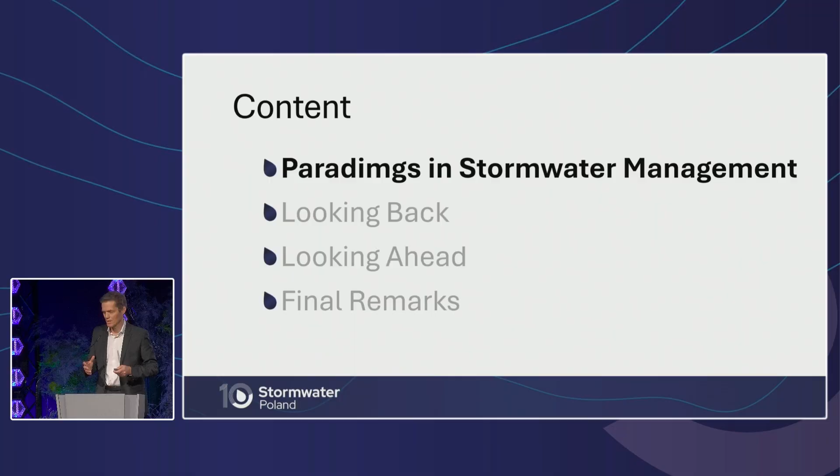So actually, I asked myself, what is a paradigm? And of course, I didn't ask myself, I asked an AI. And Gemini told me a paradigm is a shared set of assumptions, concepts, values, and practices that constitutes the framework of viewing reality and solving problems within a specific group or discipline. I think most important is the term assumptions, and it's basically the way we see and do things in our discipline.

That's our paradigms. We have theories that we check and develop and redevelop, but behind all this, there's the paradigms. There's things that we don't discuss. And that leads us to the next sentence, that paradigms act as subconscious filters. And that's important, they are subconscious. That's the problem. We cannot actively change them because we're not aware of them.

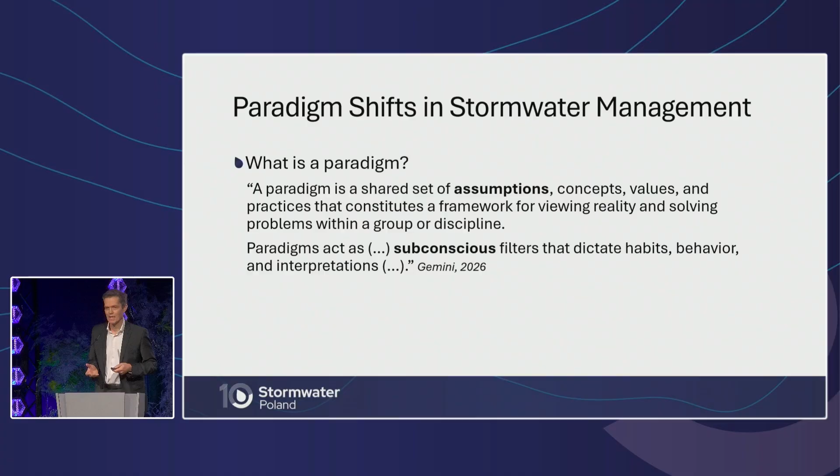So then how do paradigms shift? If we announce a paradigm shift, we have to know that there's something going wrong and we want to do something. I tried again with the AI, but the result was not nice, so I put it in my own words. When a paradigm produces unfavorable results, it may undergo a paradigm shift, which is a fundamental change in basic assumptions. And what does it mean for stormwater management? Like in physics, it's clear. You do an experiment and the result doesn't go together with anything you expected, so you have to change your paradigms. But how is it in urban drainage?

I liked the talk of the mayor this morning because he said it would be nice if we could monitor everything, parameterize it, have numbers and know where we go and assess what we're doing. But actually that's not the case yet. So we don't have a clear indication of a failure of old paradigms. And the other thing is that our observations are incomplete. What we do has many impacts on biodiversity, on many aspects of environment, and we don't have the whole picture. So we cannot really see if what we are doing is good or not, and in which way we should change. So it's more a consolidation of negative experience, which may trigger a paradigm shift.

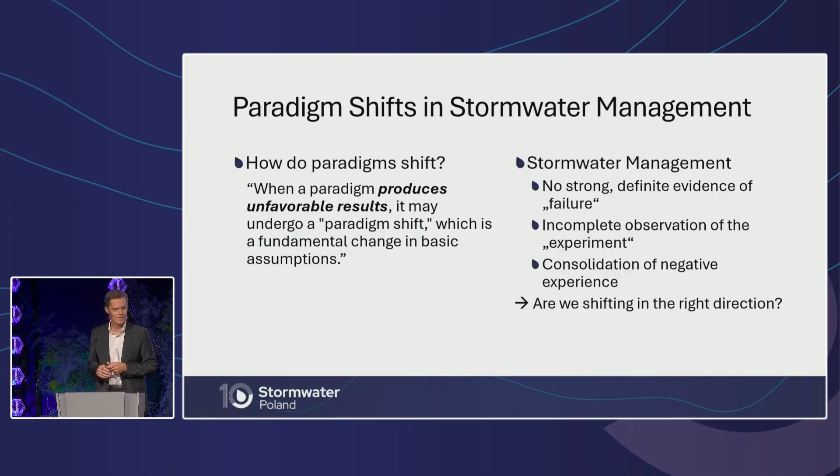And the question is, as everything is so fuzzy and we don't know exactly where we come from, where we go, are we moving in the right direction? And I think that is important with any paradigm shift. And if we want to know if we're moving in the right direction, we first have to look back at where we come from. And so I wanted to take a look back 35 years. Why exactly 35 years? Because that's when I started my university studies, but that's not important to you.

But in the early 90s, there was a lot going on, at least in Germany and in some other EU member states. And I have this very nice reference, this stormwater pollution control report that compared stormwater pollution control measures all over Europe. There was one more thing I wanted to say, but I just forgot. So this report states that in practice, there are some paradigms. It doesn't say it explicitly, but if you read it, you find that urban areas have to be drained fast and completely. That was the paradigm at that time.

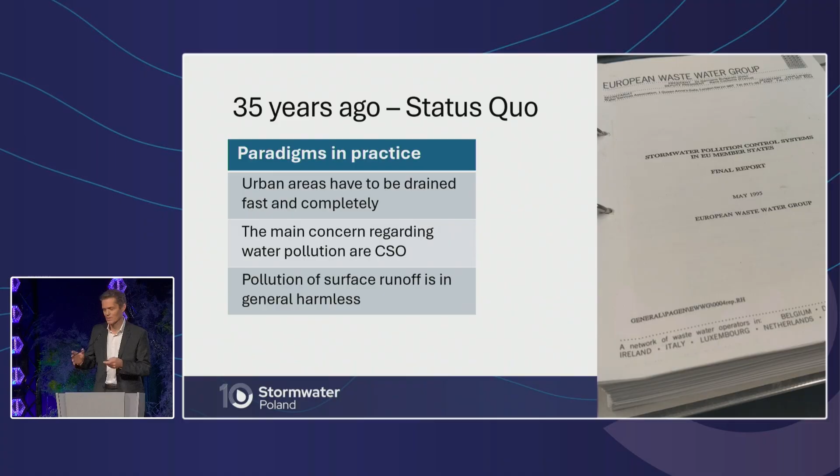The main concern regarding water pollution is combined sewer overflows. So if we don't have combined systems, we don't have a problem. Because, and that's the third one, pollution of surface runoff is no problem in general. So that was the way of thinking at that time. I'm happy that Richard is nodding.

And the consequences are that underground drainage systems were everywhere, because that's fast and efficient drainage. We want to get the water away. And then there were some regulations in some member states about CSO, but there was nothing on stormwater. And even CSO regulations were based on dilution, because we assumed that stormwater in itself is clear.

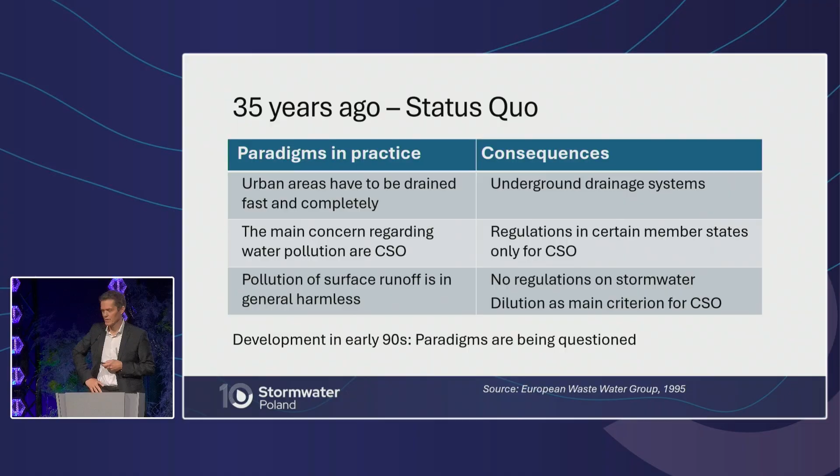But this report also states that there are some developments going on in the early 90s, and that these paradigms are increasingly being questioned. And one new paradigm was, what Herbert already mentioned, that we could manage the rain where it falls, like do source control. And that source control measures can substitute conventional drainage with lower environmental impact and at the same service level. So the goal was to reduce runoff, keep the water where it is, and do something with it.

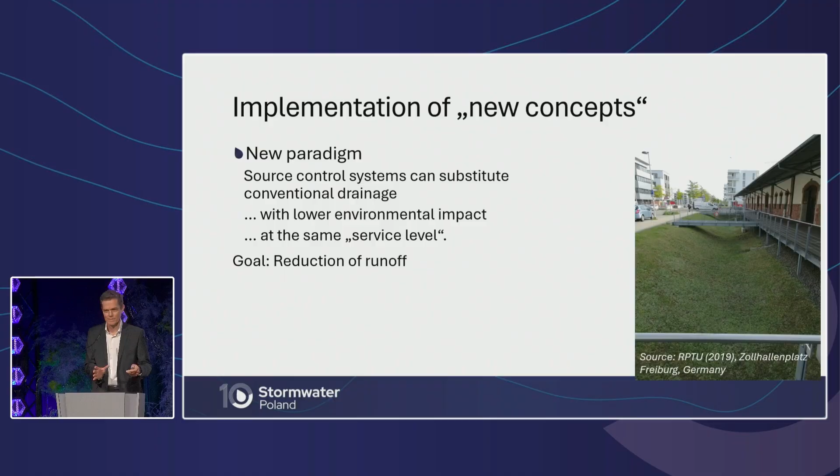But what? The main idea was building infiltration systems or bioretention. Water is retained for subsequent infiltration. And the design storm, or the idea was to have it at the same service level. That means design it for the same rain intensity as we would do with conventional systems. So we can completely replace the existing conventional system by something new, more nature-based.

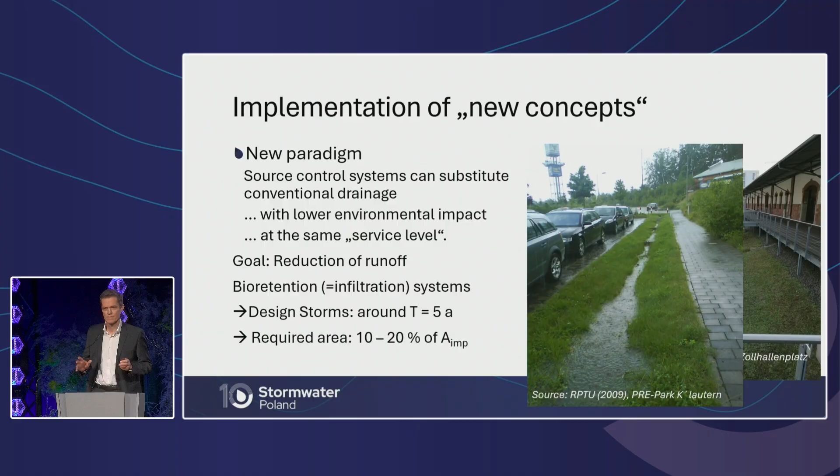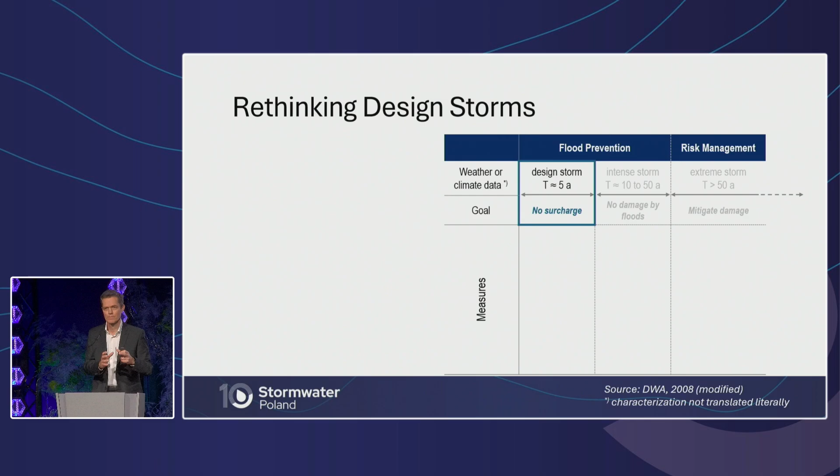Or if we build a new one, we don't even build the conventional drainage system. We just build these types of swales, retain the water, and let it infiltrate. But this requires around 10 to 20% of the connected impervious area. So that was the idea. That means the scope, what I marked here in this blue-grayish box, that's the scope of drainage. And that's the same for conventional systems or nature-like systems.

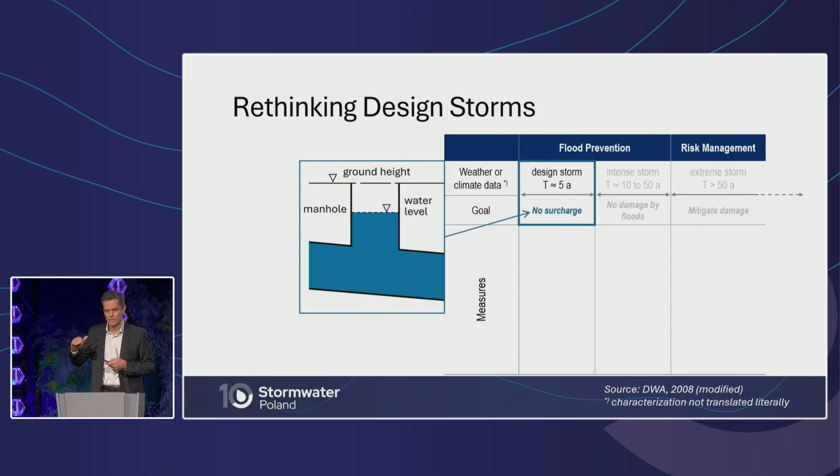The idea is up to a certain design storm that is around 5 years. It could be 3, it could be 10 in some areas, depending if you're in a city or in a less densely populated area. And water shouldn't leave your system if you don't reach this 5-year event. And this also is the same for the nature-based systems. So the scope is the same, it's just a different type of technology or hardware, let's say. And once the water leaves our system, it's not our job anymore. Somebody else has to take care of it.

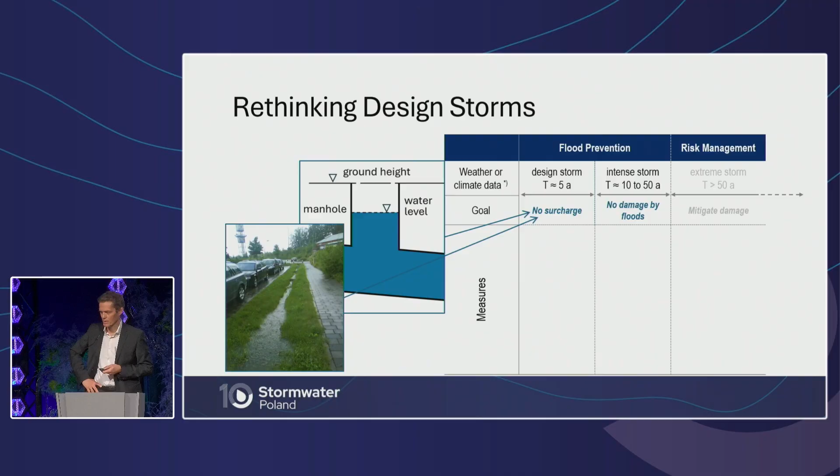But in the following years, there was more and more discussion, probably triggered by fear of climate change and more intense storm events. And urban drainage engineers became aware that it's too easy to say that's not our job. We have to handle this, and we have to work together with people that are managing the surfaces, like city planners, greenery planners. We have to get an interdisciplinary approach.

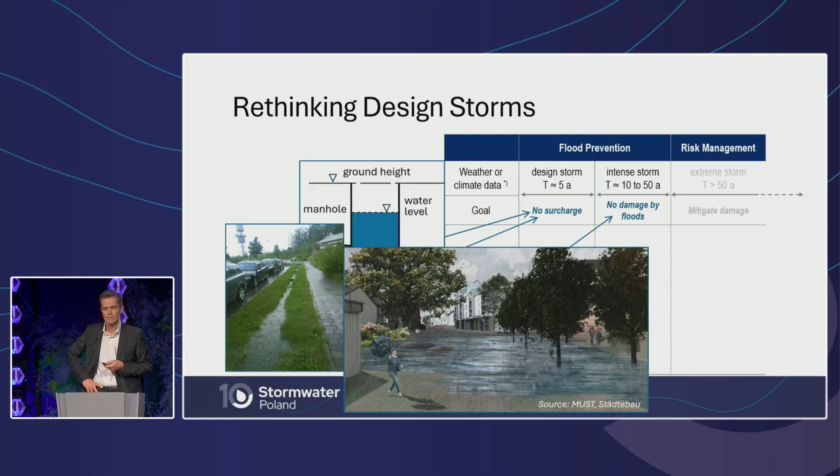And the results were, Herbert showed a lot of them. This is just one simple example of a multifunctional area. It's a square that can be flooded, and of course it's not just a flooded square. Below the square there's still a drainage feature, so we can retain the water there and have a multifunctional area.

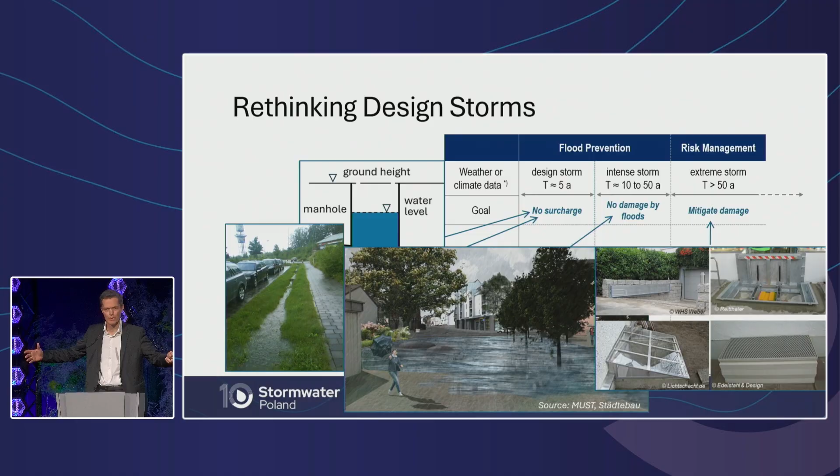But we still have to go further. What happens if this comes to a limit and we have more extreme events, and how do we mitigate damage in these cases? You're all aware, I saw the SCALGO stand here outside, that now we go up to the 100-year event and calculate this and give advice to private property owners how they can protect themselves against flooding. So the scope got much broader in the 90s.

What you see here on the right side is a very famous picture that is often used in Germany. It shows the 3 levels of severity of storm events, and that we need different types of systems or different measures to handle them. So stormwater management cannot stop at a design storm. It must apply a wide range of different measures, and it requires an interdisciplinary approach. I think that was all touched already in the previous presentation.

And it is a joint effort of various stakeholders. So it's the drainage engineers, it's the urban city planners, it's politics, and it's also the private property flood protection that is necessary.

Parallel to this, there was another tendency, another questioning of our goals, and that led more to the urban water balance. So one is these extreme storms that we talked about, heavy rainfall, but on the other hand, what happens with the day-to-day rain event? So there was this additional goal to minimize alterations of the natural water balance. That's a new goal that came up like 10, 20 years ago, to reduce the impacts on flow regime on urban waters and to reduce heat island effects.

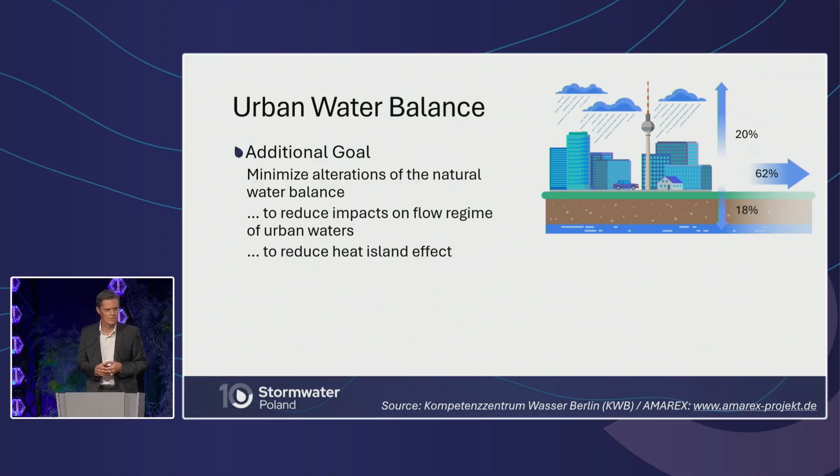You all know, as was already said, that in our cities, these are our numbers for Berlin, but it's the same in every city, the large part of the rainfall is converted into runoff, only a smaller part is infiltrating, and roughly the same part evapotranspirating: 18% infiltrating, 20% evapotranspirating.

But this is the natural system. That's where we come from. So it's a huge alteration. If an area is urbanized, the water balance is completely changed. And now we want to go back to this pre-development state. That is the idea that we want to go to, so to have low alterations compared to the previous system. But how can we do this?

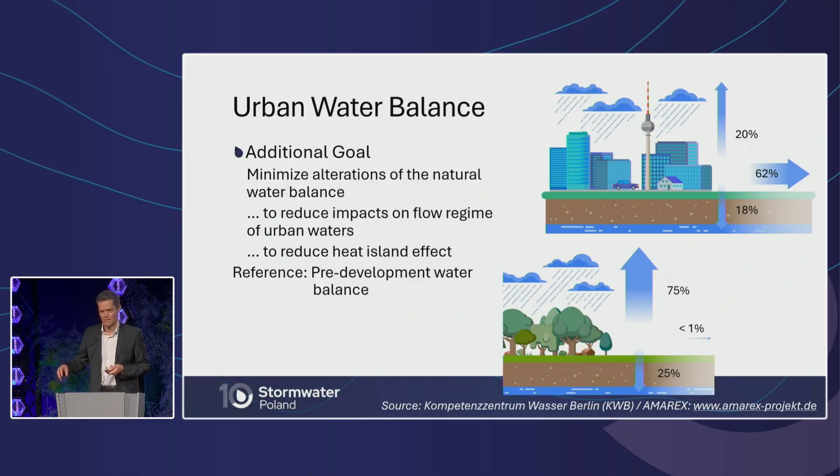Bioretention, infiltration would just increase the groundwater recharge. It would not increase the evapotranspiration, so we need to do something different. And that's where, for example, green roofs come in. This is a nice picture, looks like a garden, but it is a green roof.

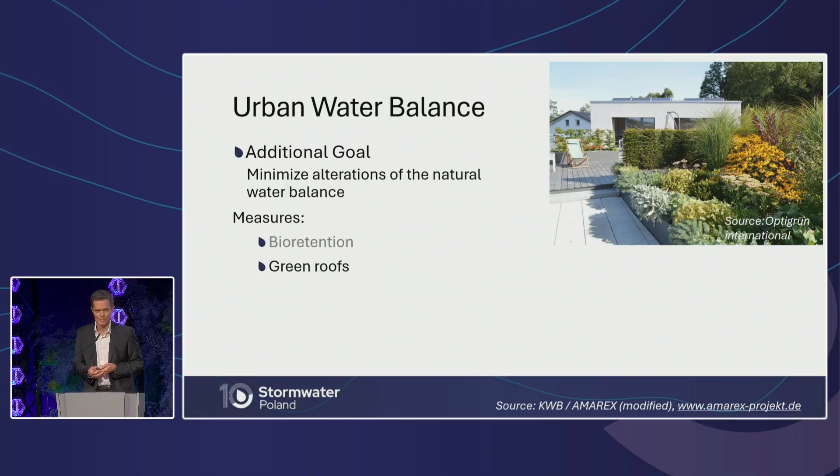Or we can store rainwater and use it for irrigation. Because if we put it on the plants and the plants evapotranspirate it, then again we have evapotranspiration. So that's another idea, just using runoff, storing it, and using it for irrigation. And I just mentioned here the keynote before, because there's a lot of nice pictures on that.

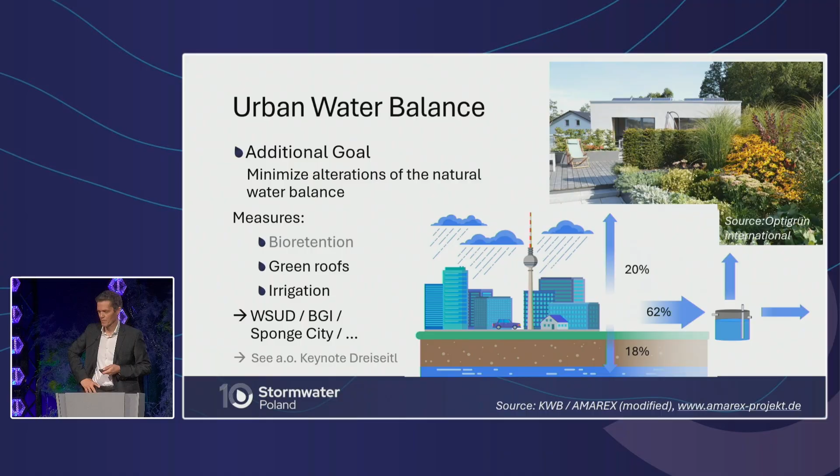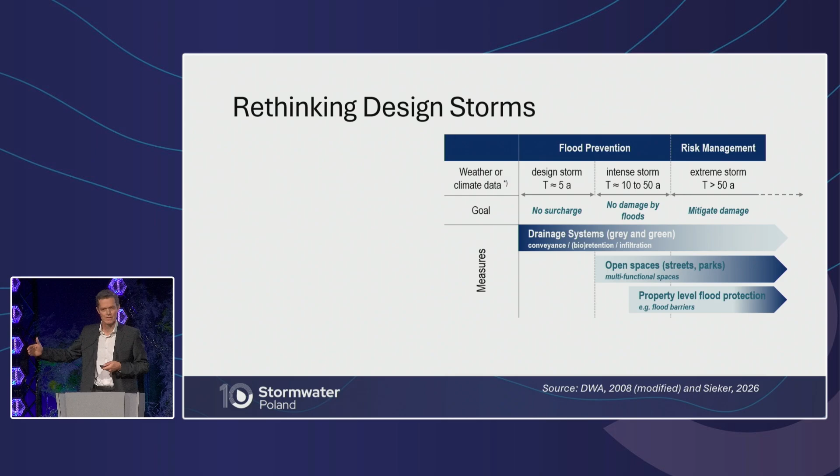So if we go back to this picture, we now have to add a new column. Because it's not only about events becoming more and more severe and more extreme, we also have the water balance that we have to consider. And in my view, to my knowledge, this is basically the up-to-date modern way of doing stormwater management, considering all this.

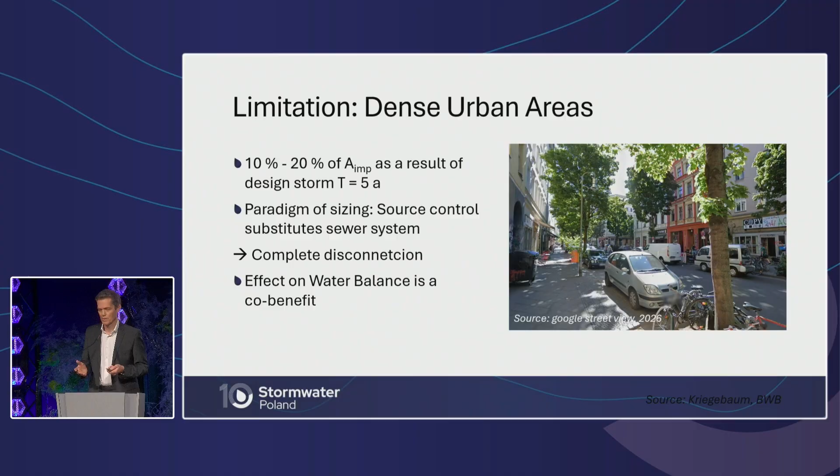But there are still challenges ahead of us, and one that is highly delicate is the limitation in dense urban areas. So how can we do this in an existing urban fabric? Look at this picture, it's taken from one of our study sites in Berlin. If you need swales, 20% of the impervious areas, where do you find them? It even gets worse if you look underground at the existing infrastructure that is already there. So then there's no space left, or hardly any space left.

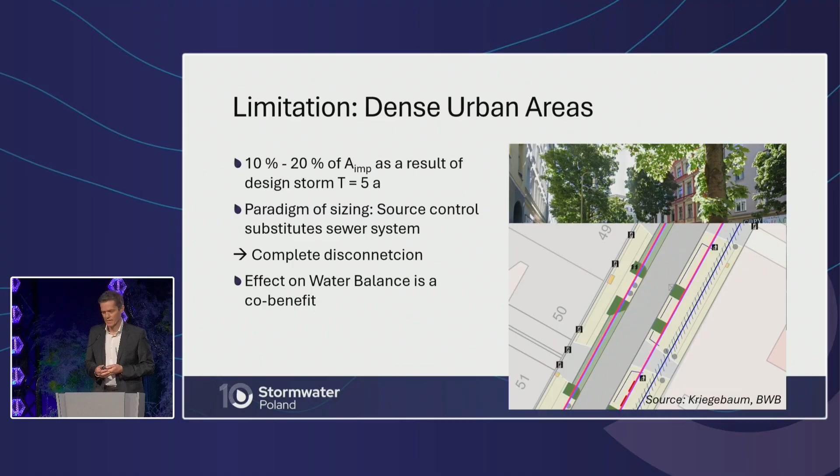But the problem, why do we have to sacrifice 20%? That's because we want to replace existing systems, to disconnect impervious areas completely. What if we change this? I would also call it a paradigm shift, but the word paradigm shift in this context seemed a bit big to me, so I put a question mark behind it.

But for me personally, it was a paradigm shift when I thought of it the first time, that we base design on the extreme events, on the 5-year event. But what if we do the design on the water balance and have it complementary to a storm sewer? So not as a substitute, but complementary. This would lead to hybrid gray, blue, green infrastructure systems that make the best of the existing system and just add something in addition.

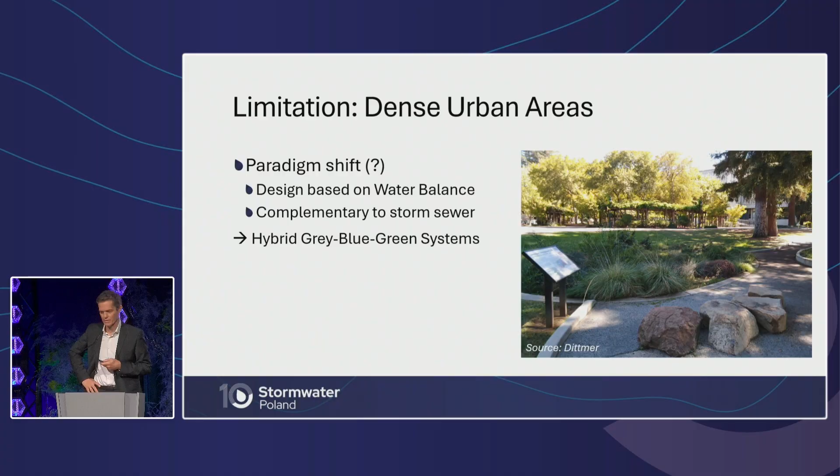There's a nice picture on the right. That's the Sacramento State University, the rain garden where they infiltrate the water from the roof. I was there at a research stay, and I made this photo, sent it back to a colleague, and this colleague said, oh, this must be a pretty small roof if this surface is large enough for infiltration. And I thought, why is it so small? And it's simply because they don't want to handle the 5-year storm or any heavy storm event.

They want to handle 85% of stormwater. That's their goal. And this leads to much smaller systems. Of course, it requires an existing stormwater sewer. The overflow goes to the stormwater sewer, and up to this 85%, you infiltrate. We tested this application for Berlin, and it resulted that we only need around 1% of the impervious area to design our biofiltration systems this way, so much smaller.

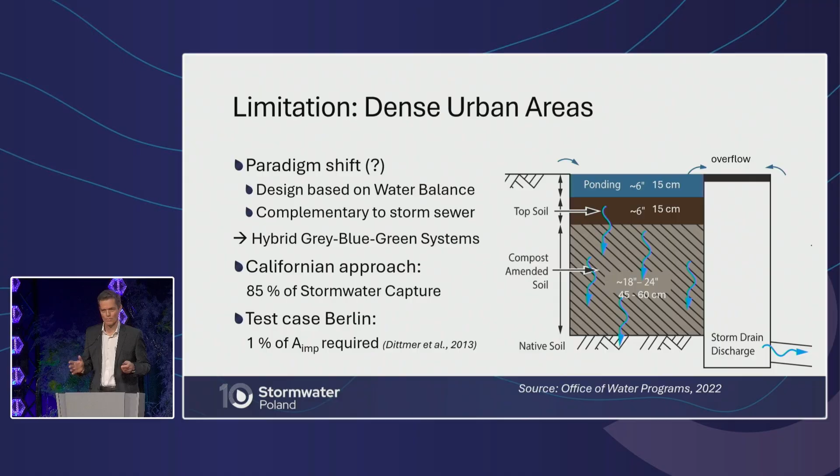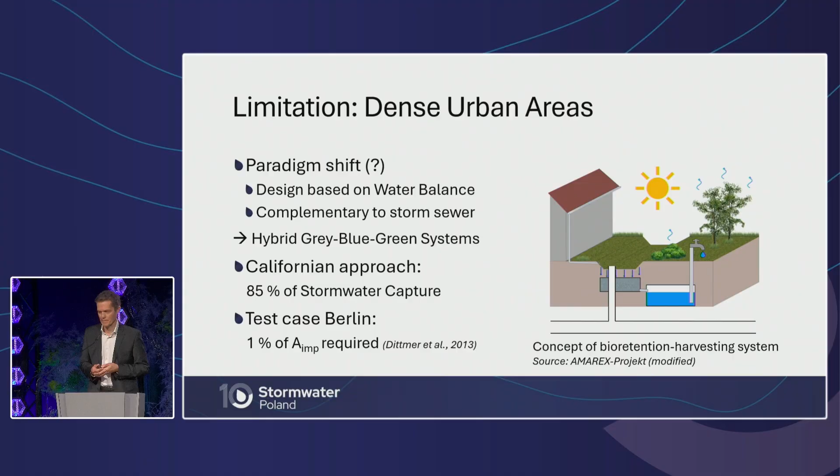And this would open new possibilities, like what I show here on the right is a concept for bioretention and harvesting systems. So if we have these smaller swales, we can infiltrate directly, then the water is treated by filtration and then stored underground and used for irrigation. So this would be a way to handle this water balance in urban areas.

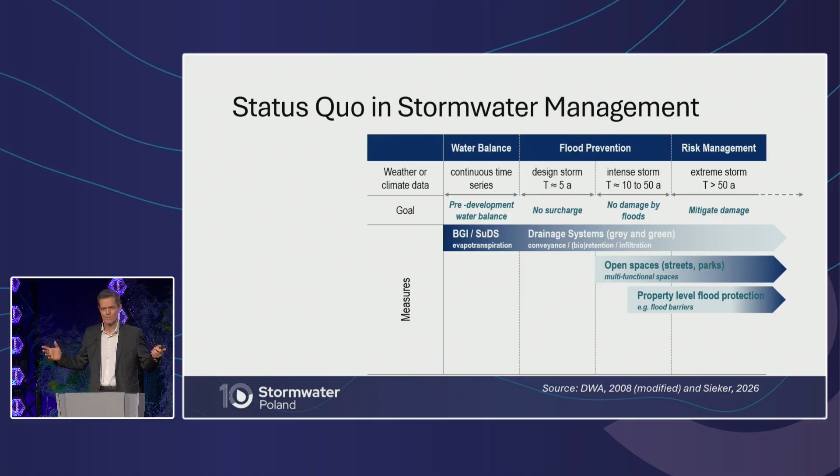But still, weather extremes are more than just water balance and extreme storms. We also have to consider droughts that are becoming more and more severe. And so I extended this picture to the left, thinking about extreme drought events. So what can we do there?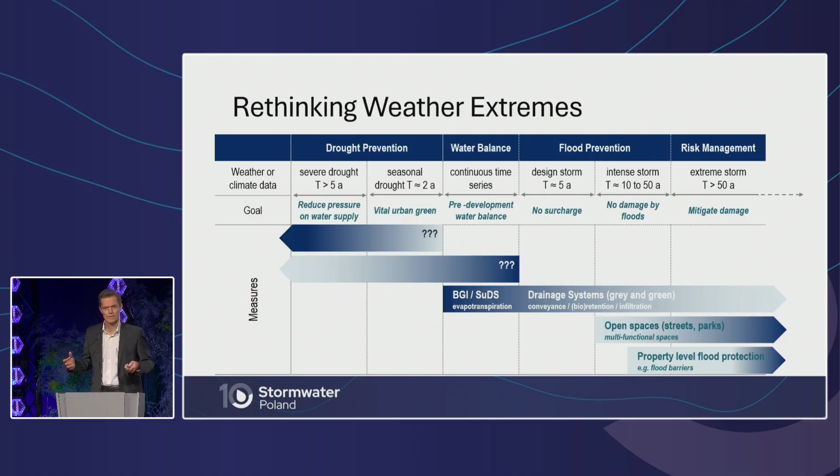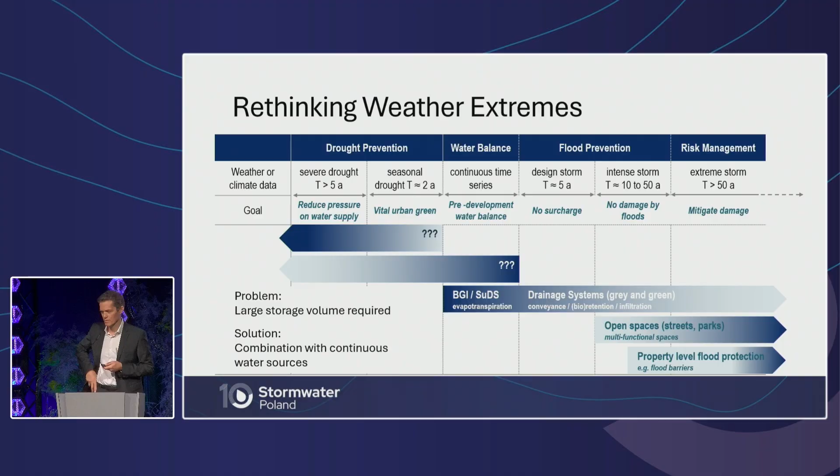So we need something different. The problem is the large storage volume that we need. The solution might be if we combine our stormwater storage with some continuous water source. And such a continuous water source could be lightly polluted gray water.

That was done in one project by a colleague of mine from our university in the INTERESS-I project, funded by our research ministry. From the building you see behind, they disconnected the showers and mixed the showers with runoff from the roof, and stored and treated it in a retention soil filter, and this worked pretty well.

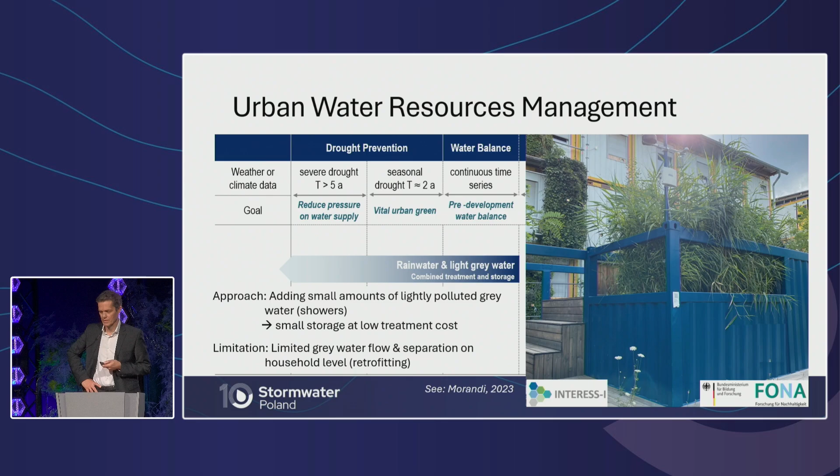But again, we have a limitation. How do you do this in existing systems? Because this requires gray water separation on the household level. So it works in a new development, but what do you do? How do you retrofit an existing system? And this is where we get to the next stage.

That's a new project that is currently running that we're doing together with Retentia, the DECIREWATER project funded by the EU with partners from many different countries, and this is just one of the demo sites we use. What we do here is combine runoff from the roof with water reclaimed from the combined sewer in the city. The water is pumped up, treated again in such a biofilter system, and then mixed with stormwater and used for irrigation.

So this is a circular water management, and this would even work under extreme droughts. The large-scale feasibility is still somewhat open, that's why it's research, but we are quite confident that there is a market potential that we can develop solutions that are ready for the market.

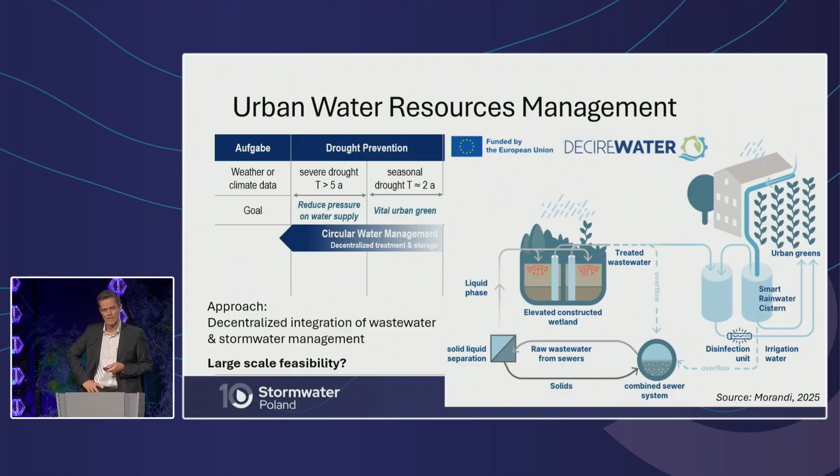So finally, this is what I would consider the broad picture. I focused here only on design goals and design parameters, because I think that is how paradigms are translated into engineering practice.

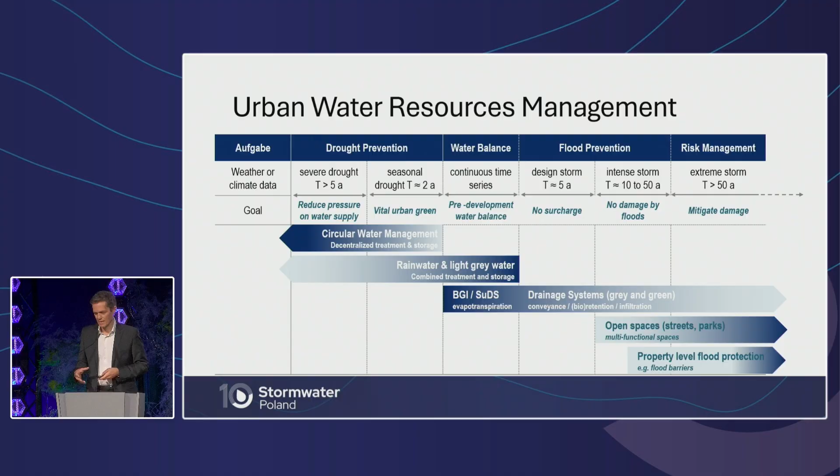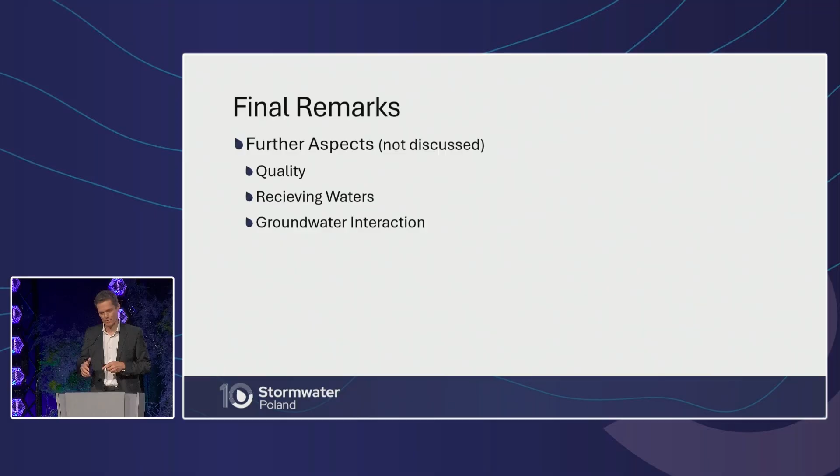And I will close with some final remarks. It looks very nice, but I left out some crucial aspects due to time and because they're getting too complicated. I did not discuss quality here. There's a lot of quality issues to be discussed: receiving waters, what effects we have on receiving water, and the drainage and groundwater interaction. I left this aside here. That doesn't mean it's not important.

And we have large challenges and risks. One risk I'm very concerned about is that it's very nice having technical decentralization, but it has to be accompanied by organizational structures that are adequate for this. At the moment, we observe in Germany more and more decentralization that is not controlled at all, so it's more or less like not doing anything anymore, because if you don't control it, people won't do it unless they are highly inspired and intrinsically motivated.

And another thing is the limits of integrated planning. Herbert already mentioned it before, that so many people have to work together, but what is integrated planning? A student once said, when I asked him, that it's the synchronization of planning processes of different disciplines. And perfect synchronization is easily reached when nobody moves. And this is sometimes the case, so it is a danger.

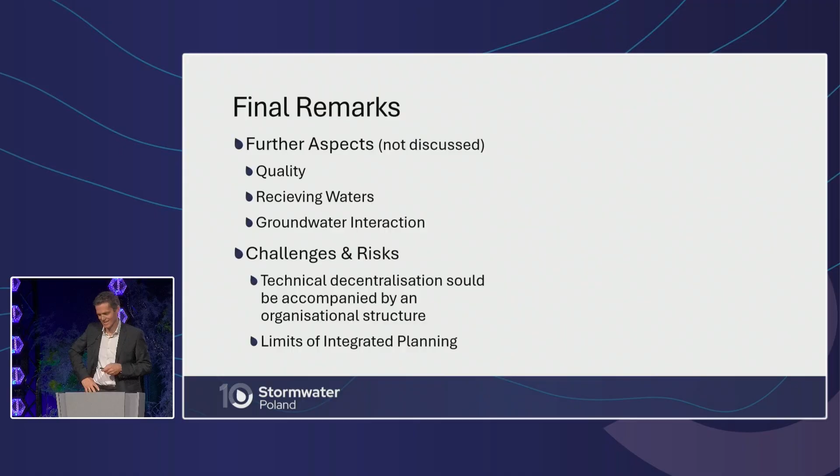And some final remarks on paradigms. Why do paradigms fail? Either because they produce unforeseen results. Like in the old days, burying urban streams was a good idea because we have more area to work on. But now we see that cities without water are not really nice and are not livable.

Or we have shifting expectations of society. There was one boom when people wanted to bathe in urban streams. Years before, everything was too expensive. They were not willing to pay for any stormwater treatment, and then they want to bathe in the water and are willing to pay all of a sudden. So we have to handle this.

Or there are new drivers, like climate change is not new anymore, but it wasn't known like 35 years ago, or not that considered. Or we have technical developments, maybe things that seem completely unfeasible are feasible all of a sudden.

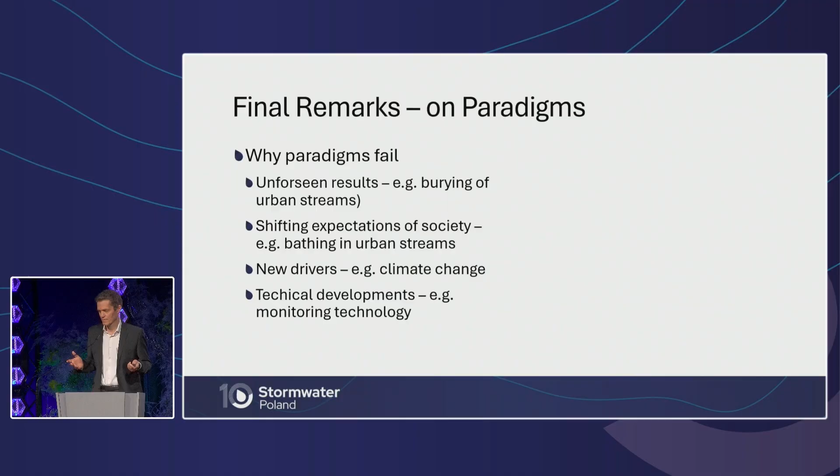But we have to be aware that paradigms are inevitable in research and practice. So if there's a period of paradigm shift, everyone thinks, oh, that was the old thinking, but now we have the new view and we know reality, but we only replace old paradigms by new ones. They're always there. And we should try to be aware of them and continuously question them as far as possible, and they should be shifted actively if there is good reason, but only if there is good reason.

Just novelty for the sake of novelty is not a good idea. Doing something different because I want to do it different, if there is no reason for it, then leave it. And last but not least, stormwater infrastructure is highly conservative due to the long service life of our systems, and we have to be aware of this.

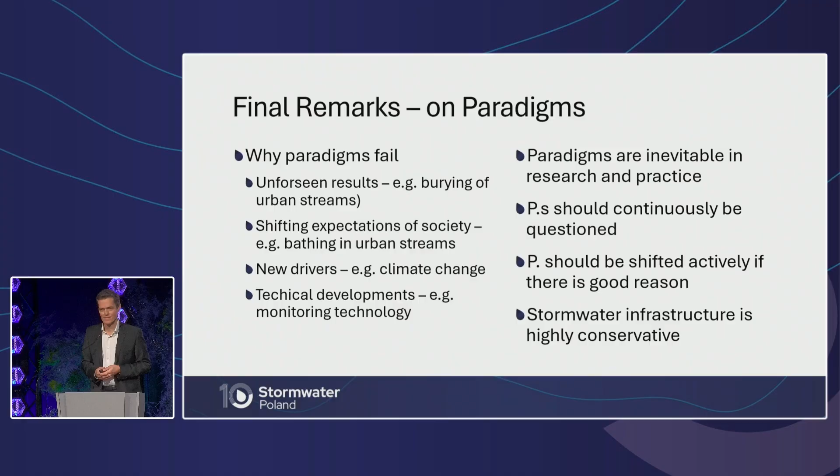So if we have a paradigm shift and want to do everything new, we have to be aware, and Herbert already said it, we need a long strategic plan. We cannot change things today and then they're different the next. So thank you for your attention.